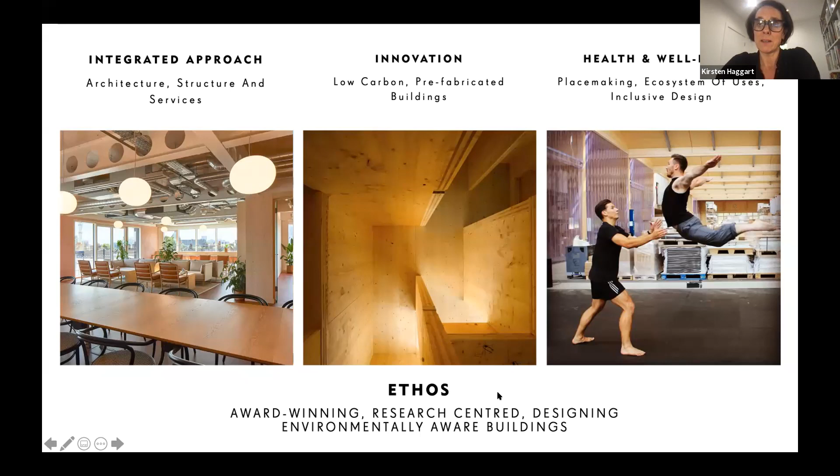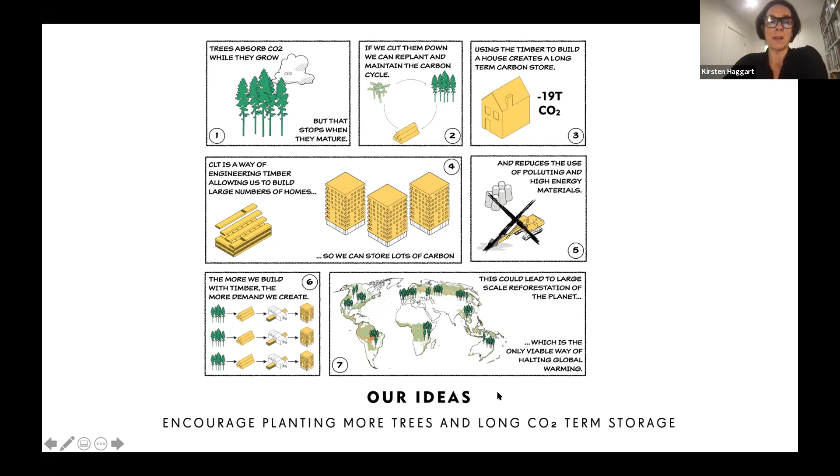So what's our idea? The key purpose of our work and one of the founding principles of it is about building more in timber, because obviously trees absorb CO2, they store it in their tree trunks. And when you cut them down to make them into buildings and then replace the trees in a sustainable way with sustainable forests, as we tend to have in Europe, that carbon that is stored in the tree is saved in the building for much longer rather than it decomposing or being burnt. So the ultimate goal is if we build more with timber, then we can reforest the planet.

And another key part of what this has led us towards is DFMA, so Design for Manufacture and Assembly. And the link here is that CLT or timber manufacture tends to be a digital process in that you send a digital model from your building model and it gets cut in the factory. So this started a chain of thought within us, which you will see later in the way that we've developed various projects. But what that means is that you get much more efficiency in the way that we build, and it's all about minimizing waste as we go forward, as we've heard from COP in the last few weeks.

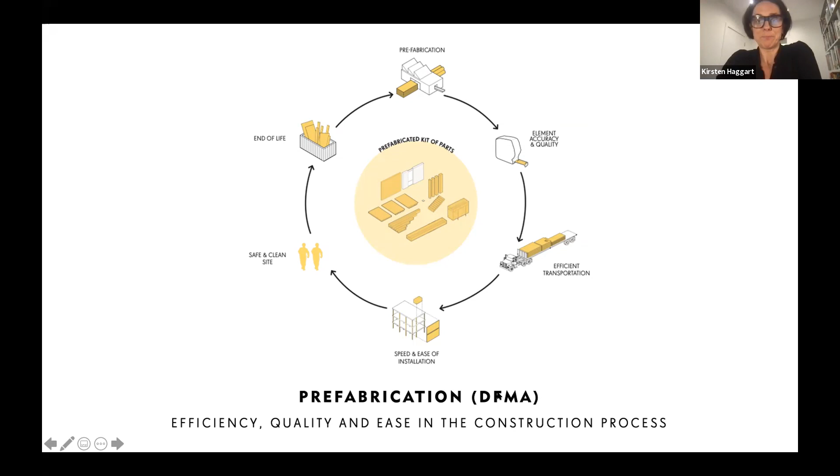So we're running out of time. Again, we've heard this quite a lot recently, and concrete and steel are actually some of the biggest polluters on the planet. If concrete was a country in its own right, it would be the third biggest polluter. So we need to think about the CO2 emissions and where we can. Obviously, concrete is a very important material for a lot of reasons within buildings, and we're not ever going to get away from that. But it's where we can substitute other more sustainable materials to achieve the same goals.

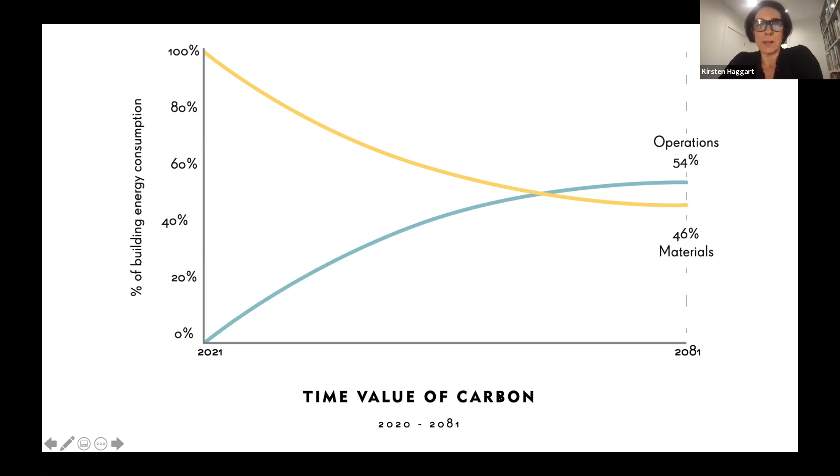So, over the last 20 years, we've been thinking a lot, and I'm sure certainly in Sweden, they were pioneers, and I'm not sure in Turkey, but I'm sure there's huge moves there as well to reduce the energy that we use in our buildings. And we're getting better at doing that by substituting, we can use energy which is from sustainable or renewable sources such as solar panels. But what we haven't been so good at is thinking about the energy used to make our buildings. And we don't have a lot of time left. So we need to think about how we can substitute out those high energy using materials for more renewable, sustainable ones.

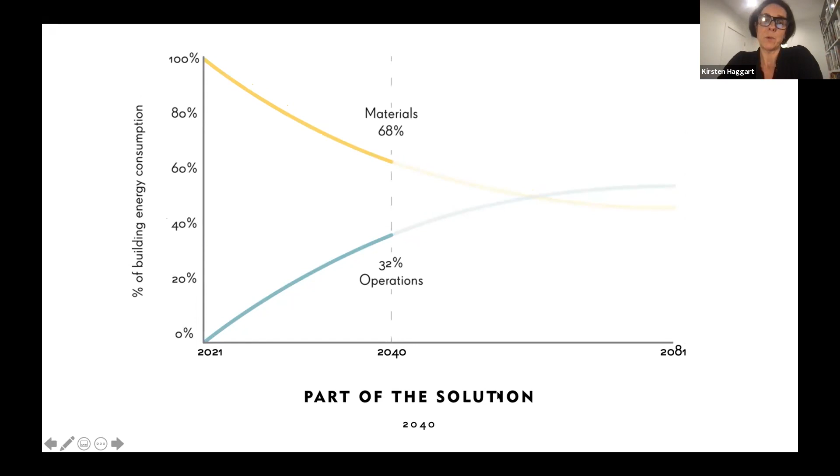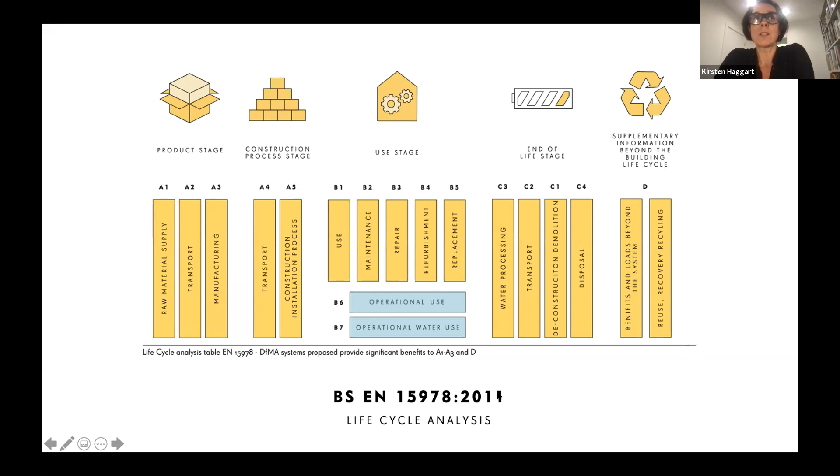And we can see through various policies and directives that are coming through in the UK that embodied carbon is going to be part of regulatory requirements going forward, whether that's through planning policy or building regulations. And we're going to need to be able to calculate a life cycle analysis for every building that we submit. Certainly in London, the larger scale projects are already asking for this. And at the moment, they're benchmarking what the carbon footprint of buildings is currently in order to then set targets for how they should be going forward.

So when we're thinking about this, as I mentioned, the energy in use, so the lighting and electricity that we use in our buildings, is often offset by renewable energy in the supply. With embodied carbon, what we can think about is the amount of energy it takes to make the building, but we can also think about how that can be offset against the carbon that, as I mentioned earlier, is stored in the materials that we're using. And then we've all heard about carbon offsetting as well, which is another way of doing this.

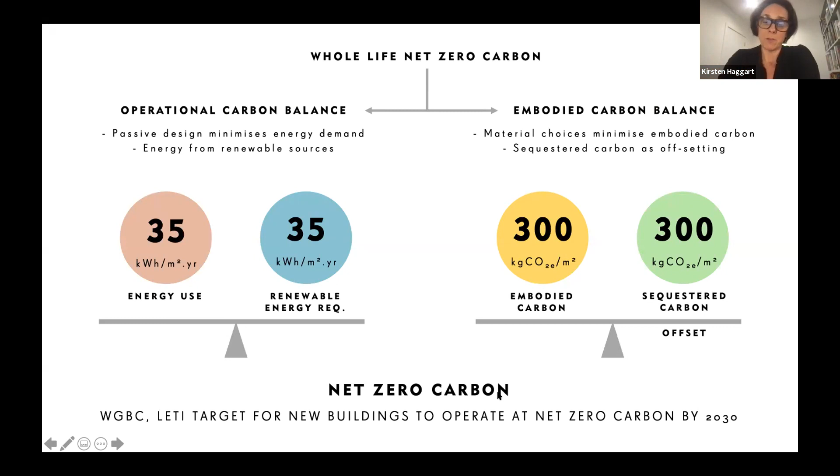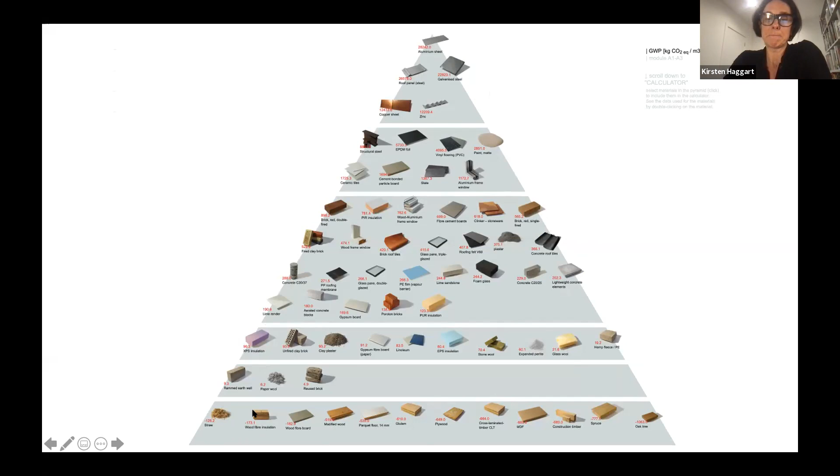And this gives you a sense of where we should be focusing our efforts. Obviously, in structure, which takes up the biggest part of a project, that's where we need to be thinking about what we can substitute in those areas. Obviously, retrofit is an important factor in how we're going to move forward with sustainability. So the more we can reuse existing buildings, the better off we'll be.

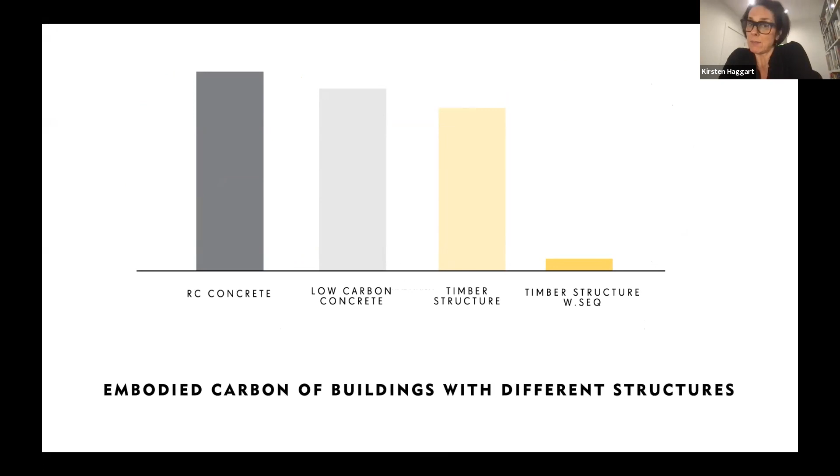And this gives you a sense of, if you use a typical RC frame compared to a timber frame, when you account for the sequestered carbon, so the carbon stored in the material, then we're getting down to very low levels in terms of our carbon footprint. And there's lots of ways we can do that. And this is really the next part of the talk, to demonstrate how we've gone about this over the last 15 or so years.

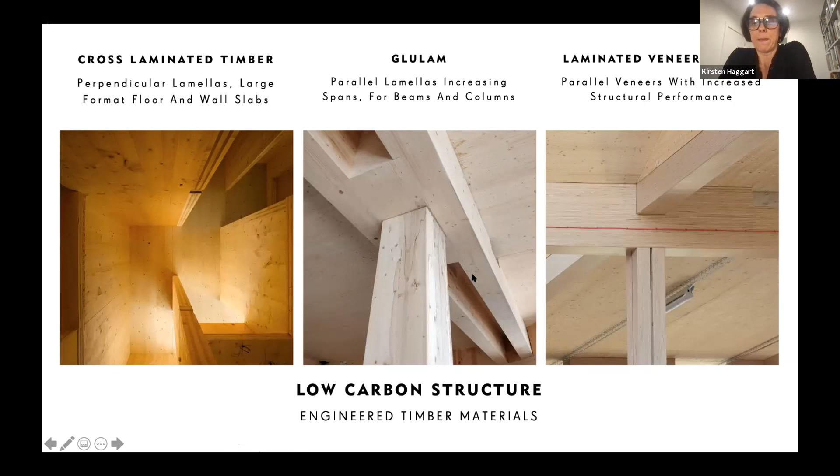And this is one of the first projects that I worked on, back in 2008. This was a honeycomb CLT structure. So those panels that I just showed you were just stacked on top of each other. We try and make sure that all the structural lines go all the way through the building, which was relatively simple to do in this project, which was a housing project. The structure was built in 8 weeks. So 8 floors in 8 weeks.

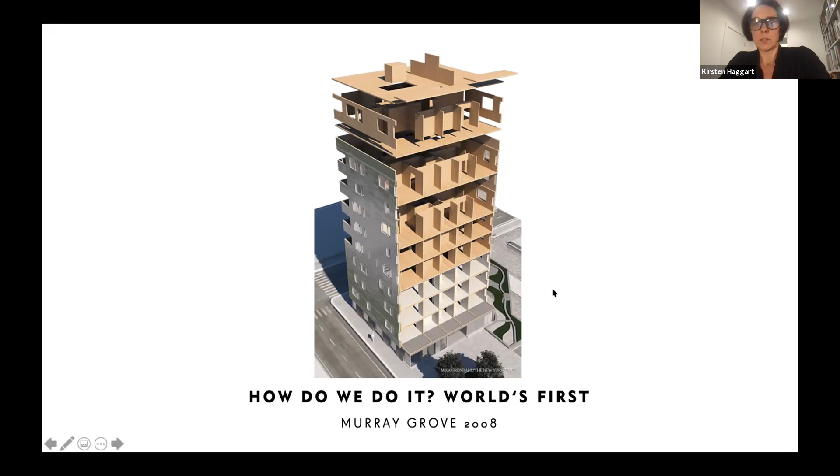Can I interrupt you for 1 second? Yeah. Just to clarify something, because you went through regulations. I know this, but I just wanted to make clear to everybody in Turkey that the municipalities, the building regulations, require you to do the carbon calculations these days. Am I right? Well, it's not in policy yet. We're actually working with one of the London boroughs, and they are updating their policy to include that, and that's going to happen early next year.

And the GLA are asking, so it's not specified what the carbon content of your building needs to be at the moment. What they're asking is for everyone to submit their LCA for a project, so that they get a sense of what the carbon footprint of buildings currently is, so that they can use that as a benchmark to then implement policy. So it's not in policy at the moment, but it will be. Yeah. That's a key difference between Turkish experience and European experience, that government and local government take proactive action towards COP26 ideals. That's a very important factor here.

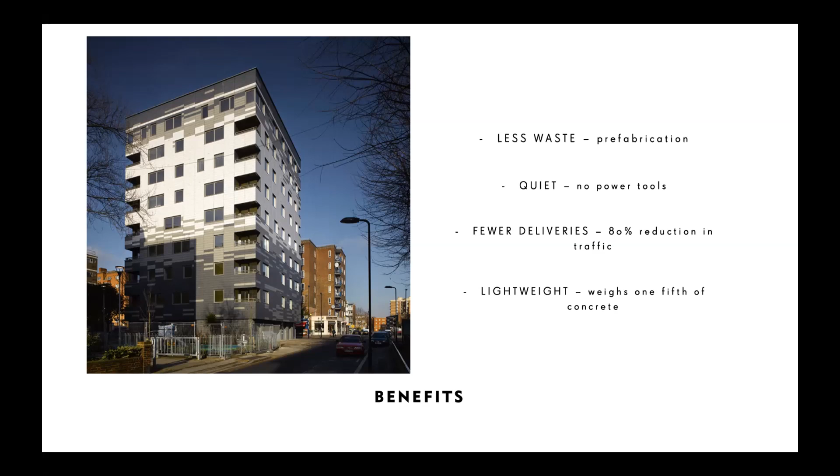The other thing that I want to ask you about, because this will come to people's minds: what about earthquake design in earthquake zones? Such CLT projects presumably are also quite good for earthquake design because of the bracing that you get across all planes, don't you? Because this reminds me of tunnel form construction, which is used a lot in Turkey, a concrete system that also lines up all the elements all the way up. So this would also work quite well in terms of earthquake design, wouldn't it?

Yeah, absolutely, even on a multi-story building. And also because it has an element of slight flexibility in it. And actually one of the research projects that we're doing, called Build-in-Wood, which I'll touch on a little bit, we've got the University of Athens doing seismic testing on the project, which is a glulam frame project. But yes, there has been testing previously, and it does work in seismic areas. Okay, thanks. Great.

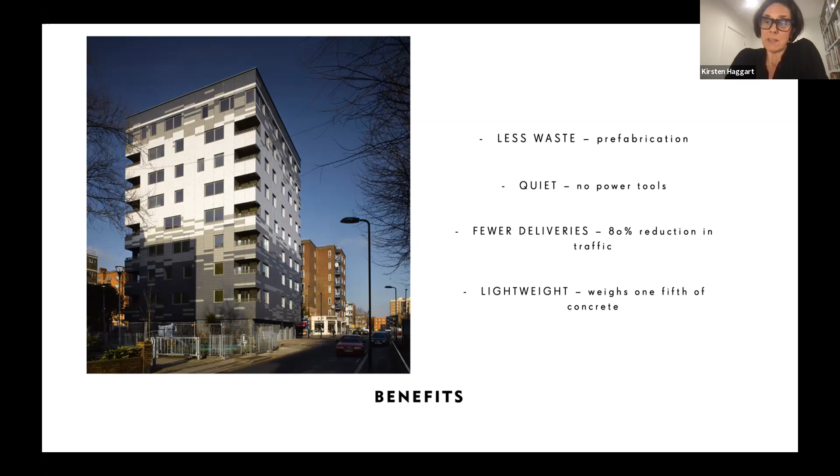So this is the final building, and as you can see there on the right, it's not just the carbon reduction that you get from using timber, but there are lots of other benefits which are really important to talk to developers and clients about. So there's less waste. In an inner city environment like London, it's really quiet. We have fewer deliveries. Also it's very lightweight, so your foundations, generally speaking, are much less than they would be if it was a concrete frame.

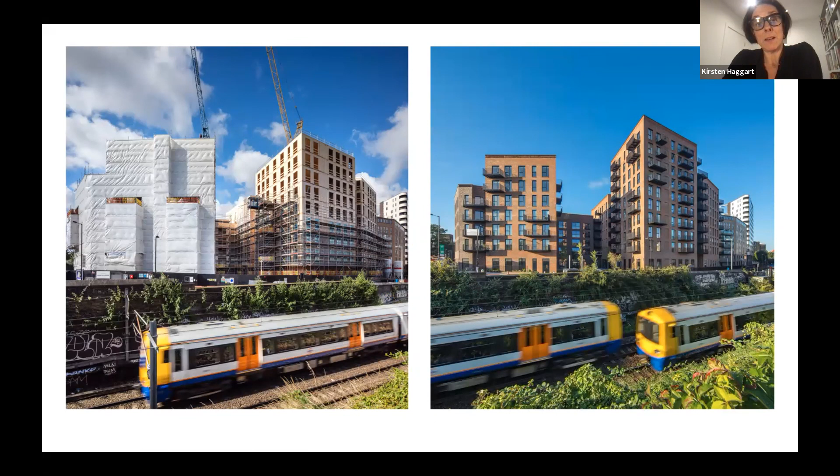And we loved it so much that we wrote a book about it, which I'm sure we can make available to whoever wants one. And then this is another project where we learnt lessons from Murray Grove and moved on to this large, it was at the time and may still be one of the largest housing developments in CLT in the UK. So this is a CLT honeycomb structure again.

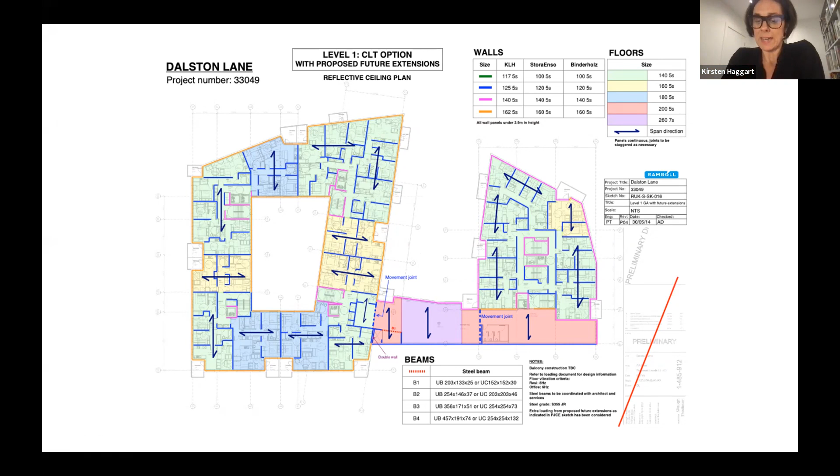But in this case, I'm not going to go in too much detail about this, but whereas in Murray Grove all the wall thicknesses were the same all the way up through the building, in this case we adopted a slightly different strategy where the thickness of the walls around the perimeter provided the stability, and the internal walls were thinner. And then as we went up the building, because the loads become less, the thickness of the panels got less. So we started to investigate material efficiency in that way on this project.

And you can see here in the UK, in London, brick is king kind of thing. And for planning reasons, we were asked to incorporate a brick facade. I think the key point here really is that buildings don't have to look timber to have a huge timber content. And I think that's quite an important message. It is about using the right materials for the right locations, and we can design in details that work for any cladding. But what we prefer to do in terms of sustainability is to use a much lighter weight facade cladding, so that again that minimizes the load, and therefore we get more material efficiency.

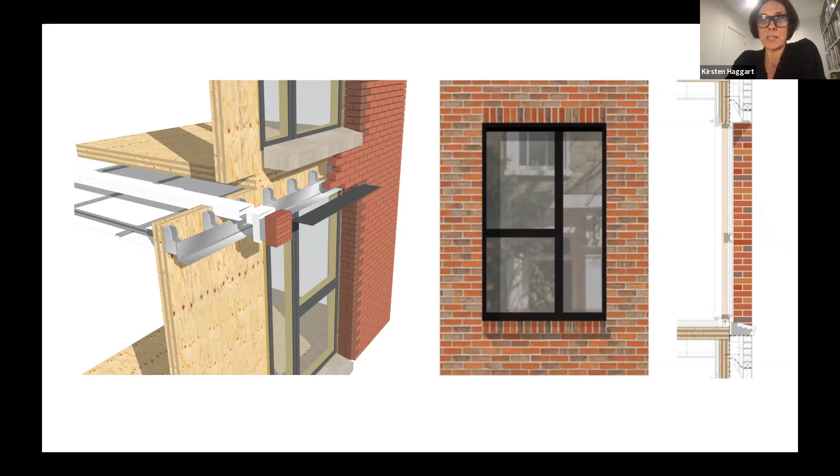And so we substituted out 10,000 tons of concrete and replaced it with 1,930 tons of timber. And also in this particular project, we were able to add additional homes because the foundations were running above the HS2 underground railway line. So that meant that if we built it in concrete, we would have had to have pile foundations. This was actually built on a raft, and the concrete in the foundations was much less. We had fewer deliveries, as previously mentioned.

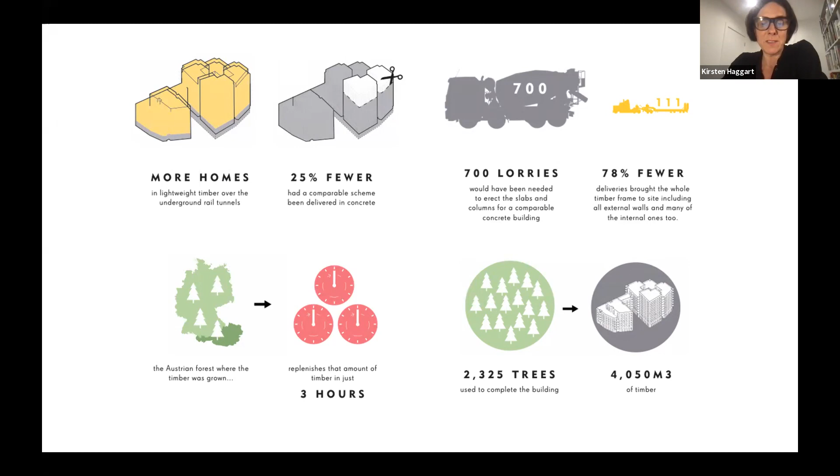And then I think sometimes people worry about the carrying capacity of the forests in Europe. But as you can see here, if we look at this area of Austrian forest, it would take 3 hours to grow the quantity of timber that we've got in this building. And then we have also, in a collaborative way, pulled together a book called The 100 Projects of UK CLT, bringing together architects across different disciplines and showcasing timber architecture to, again, try and break down some of those barriers that people perceive about building in wood.

So then just thinking on a larger scale, I just threw in a couple of Scandinavian projects because of the link with Sweden, and this is in Bergen. In this particular project, because Bergen's surrounded by 7 mountains, a lot of people are moving out of the city. So we were asked to look at perhaps building a master plan over a lake. And one of the things that we try and do with our projects is to look from the very early stages at the massing and how we can maximize daylight into a project, and through the massing reduce the energy load on the building internally.

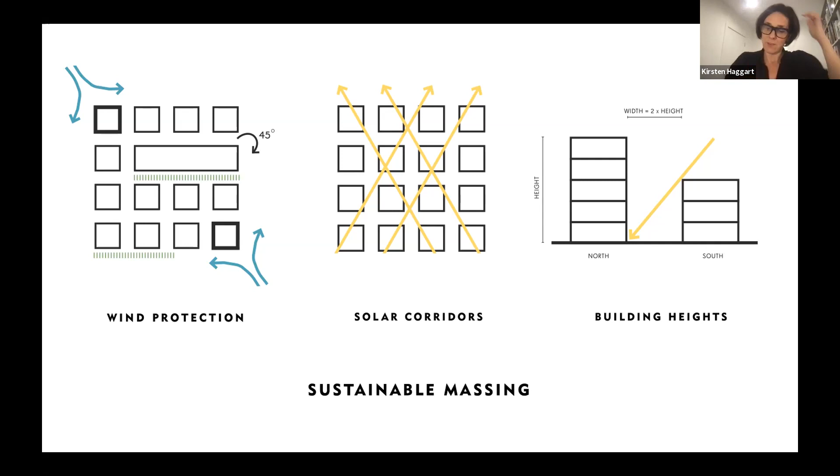So in this particular one, we introduced solar corridors, which allowed more daylight in the morning and the evening to enter into the scheme. And this is a visual of what it would look like. And so these corridors, these canals, sort of Venice of the North, run through the project and through the amenity space to allow as much daylight in as possible. And it also grades up in terms of height, so it goes from low scale to the south and taller to the north. And all this would be built in CLT, and the foundations were made from tunneling that was happening.

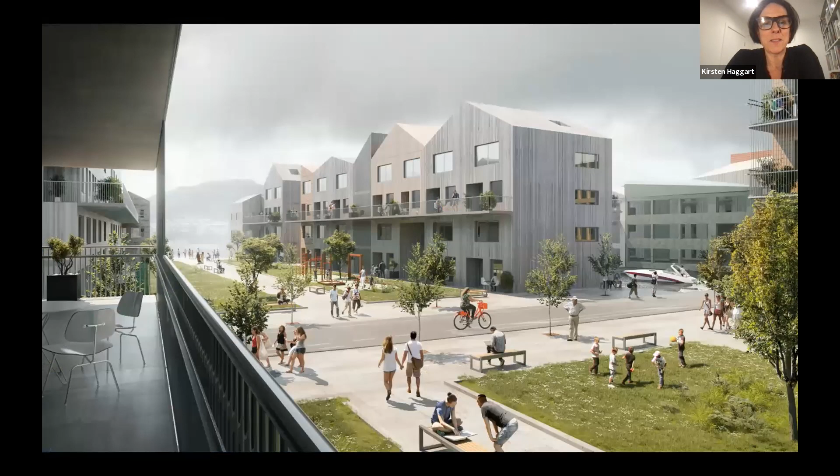They're building a new railway around the city and going through the mountains, and they needed a place to put all the rubble. So we suggested this would be a good opportunity to make the foundations. So you get a sense of what this space could look like, and a boardwalk along the tall side of the project.

Another Scandinavian project is Årstafältet, which we're doing for Folkhem. I believe you had a bit of a talk from Wingårdhs, is it, about Strandparken, and it was the same developer that has commissioned us to look at this. Yes. This is a 229 apartment development in Stockholm. There are several plots in the Årstafältet master plan.

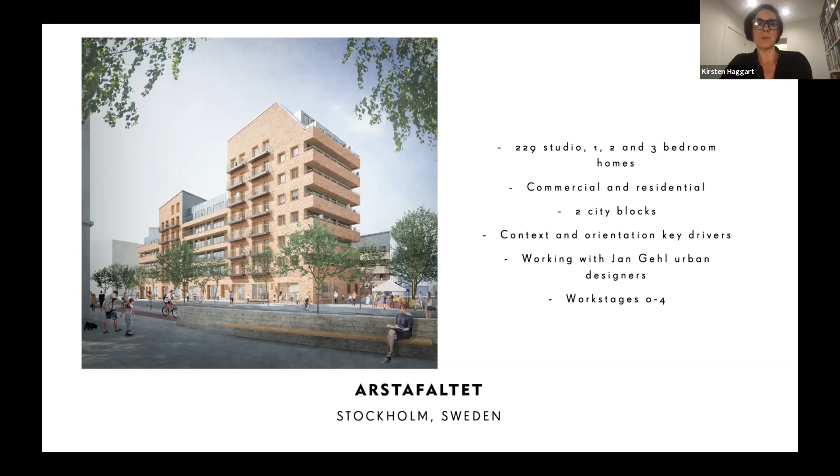And on this project, again, a CLT platform construction. In this case, we've got a tile cladding on the outside. So kind of moving towards that lightweight cladding that I mentioned earlier in terms of material efficiency and reducing loads, and therefore reducing the thickness of the timber that we're using. And this was really interesting because Jan Gehl were working on the master plan, and they had set out some principles about how the blocks were going to be broken down.

But again, here, just as an overall concept, thinking about how daylight and sunlight gets into the project and maximizing these solar corridors to make sure that the courtyard in the center of each of the blocks will be lit as much as possible, and the flats surrounding it will be daylit as much as possible, thereby reducing the energy load on the building.

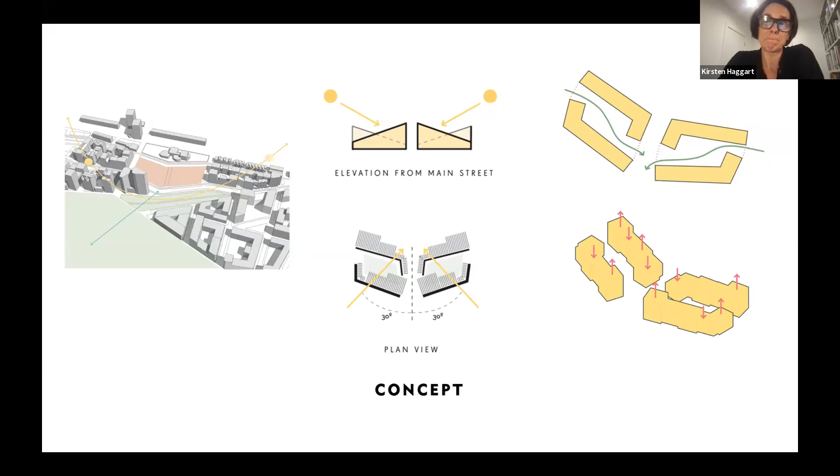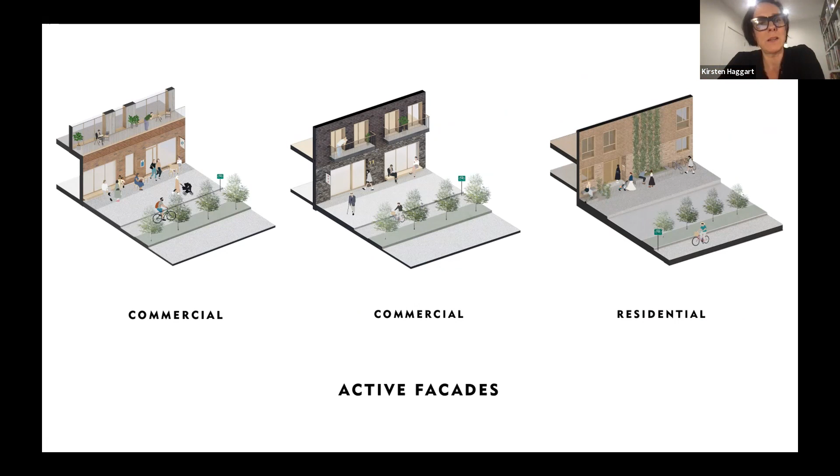And this just gives a flavour of some of the facades that we looked at, which also incorporate some of Jan Gehl's principles about places for seating, breaking down the facade into, I think it was 60 metre, 30 metre, 18 metre, and then 6 metre zones, so that you get a real human scale to the project, which was a really lovely opportunity to work with those parameters. And there, that gives you the Jan Gehl master plan requirements.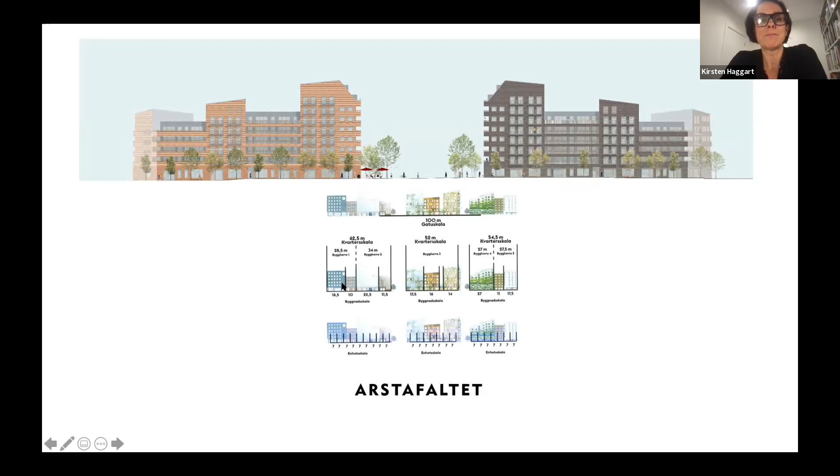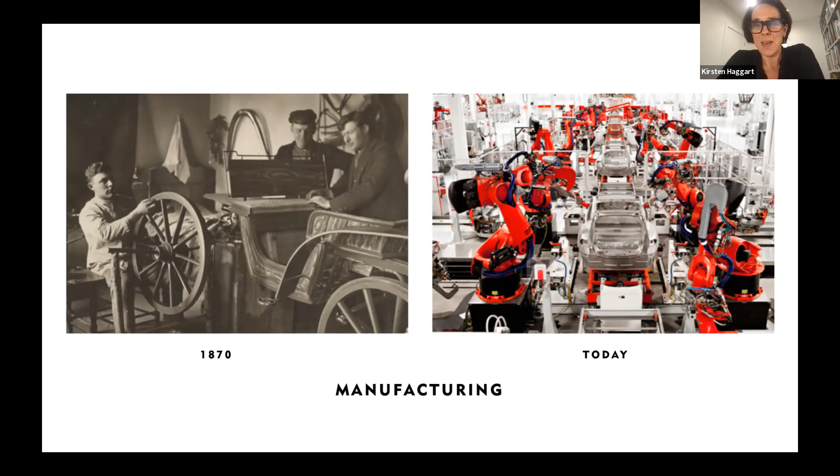Then moving on to modern methods of construction and manufacturing, and how we can bring more efficiency into architecture and building. So we can see here, the automotive industry has evolved unrecognizably from its beginnings in 1870, and they're made of a kit of parts that are brought to the factory and assembled. So it's an assembly line.

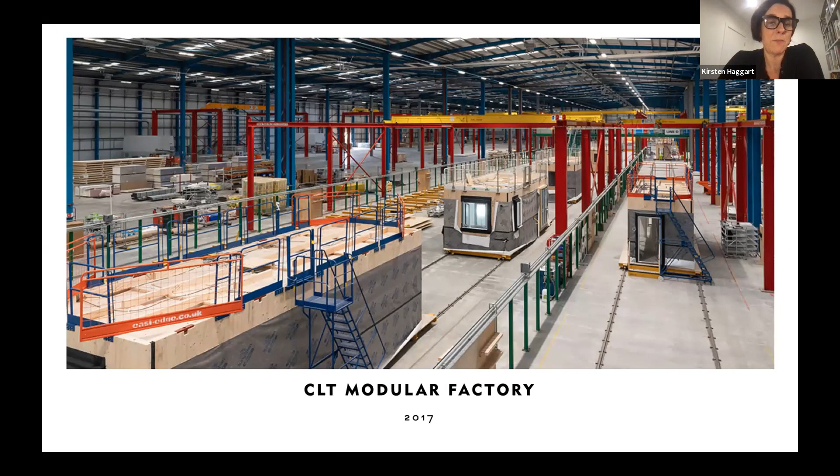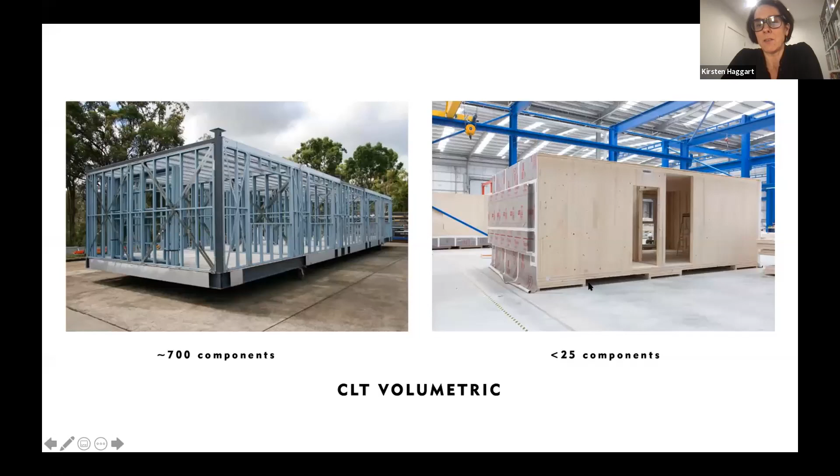And this is an example of the L&G assembly line; we helped them to develop their modular product. And this is also made out of CLT, so it's a CLT modular design. And L&G, being a big investment company, saw the benefit of going towards a more mechanized way of building. Again, it's about parts coming together. And if you're thinking about the number of parts we have to bring together, if we go for a light gauge steel option, there are so many more components than the simplicity of a CLT module.

And I think a lot of people are concerned about the potential repetition that you get with modular. I think there are some projects that are much better for modular, in my view, than others. For example, student housing and hotels, where you have a very repetitive model along the way. But these were actually designed for homes, which were individual homes as well as for multi-story. And we needed to build in quite a lot of flexibility into the system itself.

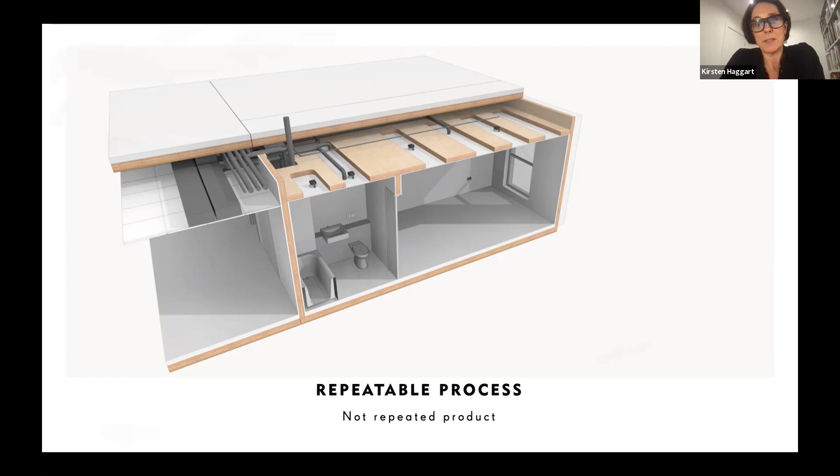This one was for Swan Housing, who have also built their own factory. And we helped them to develop a design guide for their product, as well as helping them with the manufacturing process. So it was a really fascinating project to be involved in, and also meant that we had to rethink how architects think about building, because in a conventional build, it's not really our responsibility to worry about how parts of the building arrive on site. But with modular, you've got to get it from the factory to the site. So how it's going to be transported, how it's going to be lifted into place, all need to be considered. So it's a whole new way of thinking.

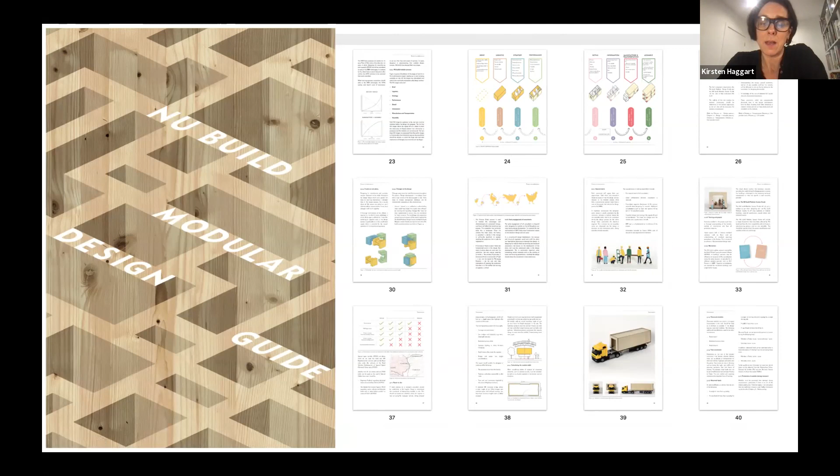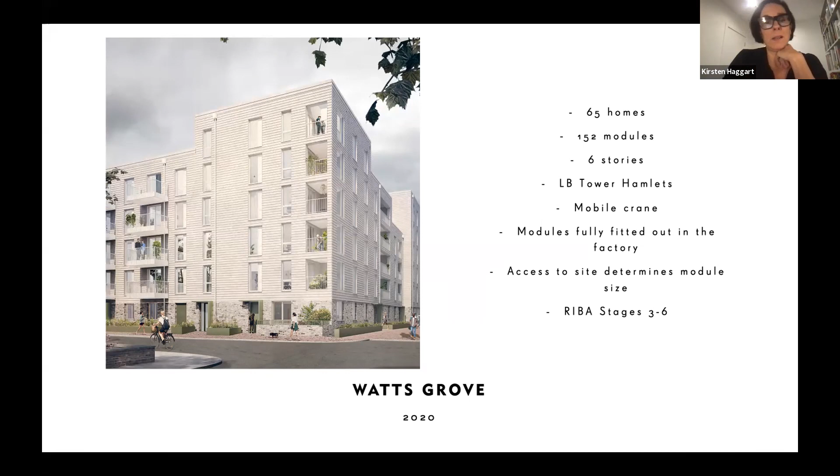Can I ask a question? Ooh, yeah. Can I ask a question about comparison of cost to an equivalent concrete or steel frame building? Yeah. Have you done that kind of study as well? Did you do a cost analysis?

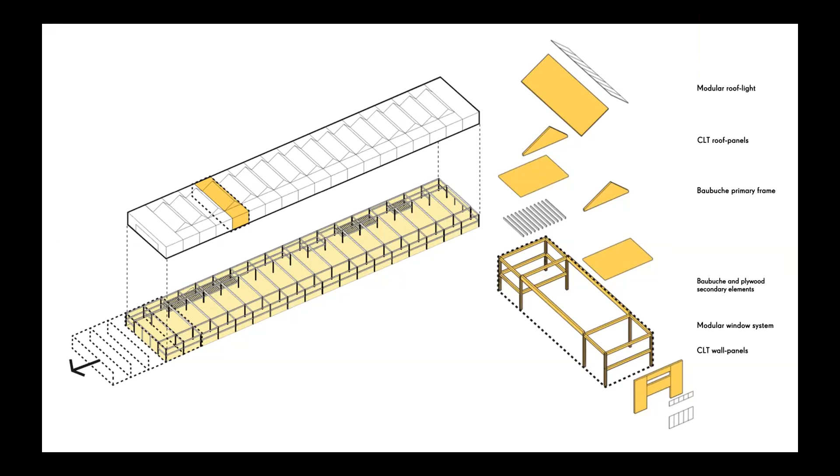Particularly for clients who aren't coming to us for a timber building, there are many benefits along the way that they realise it's a good alternative for that reason. So you don't have to sell it purely on its environmental credentials. No. It's also cost equivalent, especially in a market like England. Yeah. I think with maybe the big distribution warehouses made out of steel, we might struggle a little bit more to get those over the line in terms of the costs.

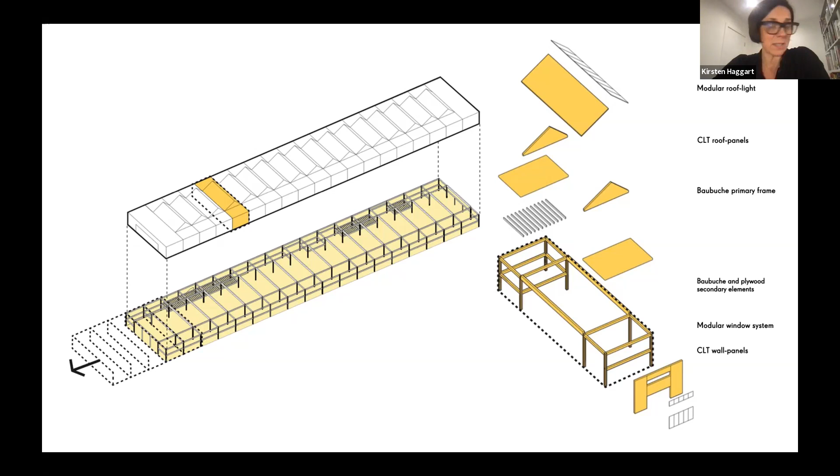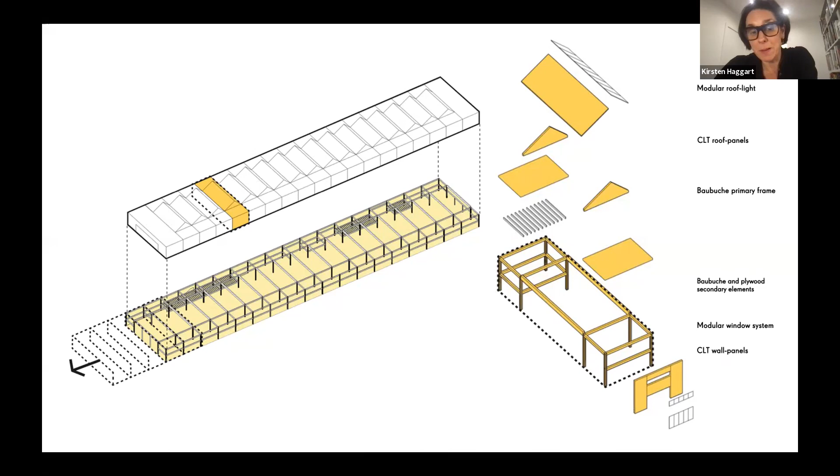But interestingly, Stora Enso have just developed an industrial glulam system, which includes CLT, and is really interesting. They've got various different scales and sizes, so they're working towards a more industrial approach and how we can substitute out steel and concrete for those sorts of buildings as well, which is fascinating. So the argument against cost is diminished as well, because the more they build, the lower the costs. And once you've got a system that's set in stone, you know what the parameters are, you can roll them out more easily. Yeah.

And this is a project we've got on site at the moment called Black and White. It's just around the corner. So if anyone's over in London, we're always happy to take you on a site visit. This is our Black and White project, which is a commercial building, offices. It is 4,500 square meters and is made again from an LVL frame with CLT floor plates. The timber facade is parametrically designed, so each facade is slightly different in response to the sunlight and to minimize overheating in the building.

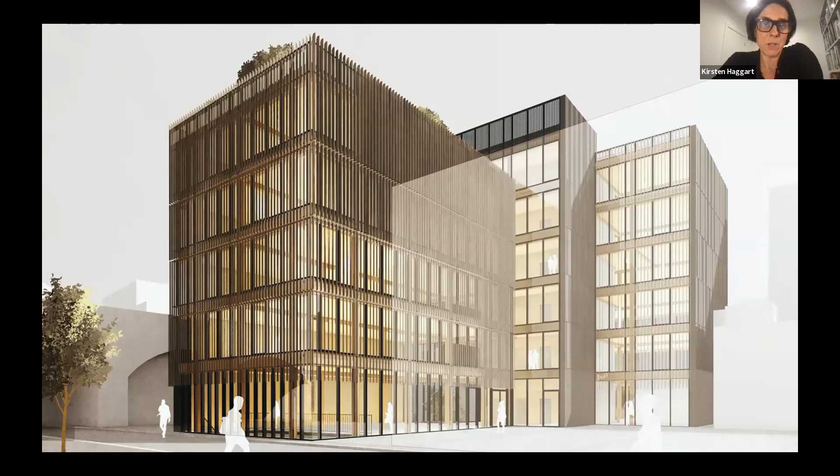And this is a CGI of it, which was a planning CGI. And because we've done a few commercial buildings now, this is our third office building near the office. We have others around the world. But what we're finding is that developers are coming to us now for that biophilic and sustainable model that they can sell to possible tenants. And I think this is something that we're going to see more and more of. Well-being for employees is becoming really important.

So yes, it's made from bio-based materials. It sequesters 55 kilograms of CO2 equivalent per meter squared. It's passively designed as much as possible to enhance natural ventilation. And the carbon footprint has been reduced by as much as 60% compared to if it had been made out of concrete.

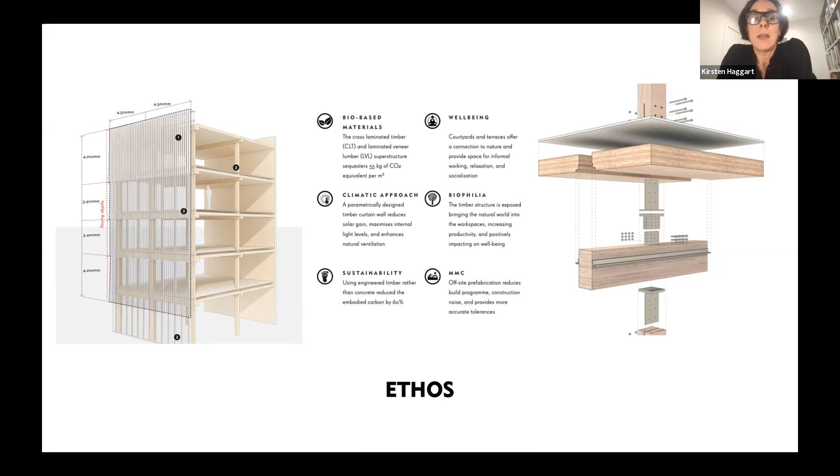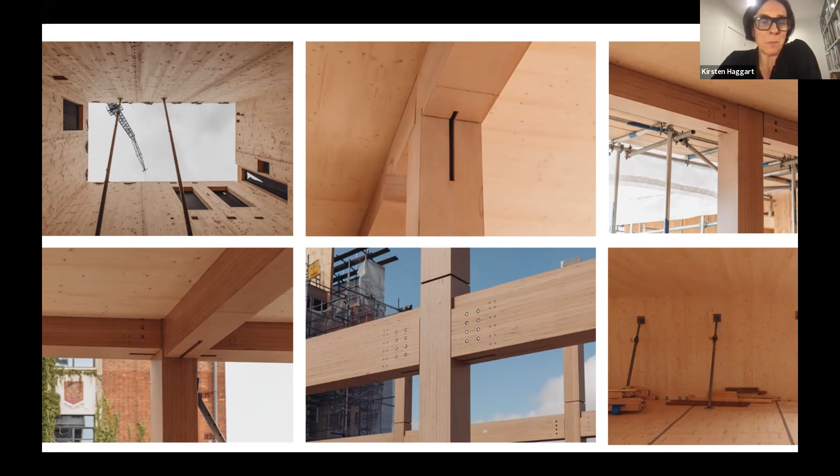And what we need to get closer to is how we can link all the consultants' information seamlessly through to manufacture, so that the holy grail really is kind of the same as building a car. It's a production line. When you get to site, it's bringing together components rather than actually every single part of the building coming together.

And you can get a sense here of how these spaces are going to feel when they're occupied. And then finally, I'm just going to touch really quickly on the Build in Wood project that we're doing, which is an EU-funded project, 10 million euro, led by the Danish Technological Institute. And the whole purpose of the project is to break down the barriers, the perceived barriers, of building in timber

across Europe. So the objective of it is to design a multi-story system that can be used for residential and commercial up to between 4 and 10 stories, because at the time we thought, well, what are the typical heights that you would get across Europe? In London, we have a tendency to build very tall, but across the rest of Europe, certainly not in the major cities, it's a lower scale product that's needed. So that's why we ended up with that as a dimension.

And then we had to look at different regulatory requirements in terms of building regulations, look at the different markets, and also, as I touched on right at the beginning, think about retrofit. So the facade panel should work not only for the structural system, but also for applying to other existing buildings, which may well be concrete frame.

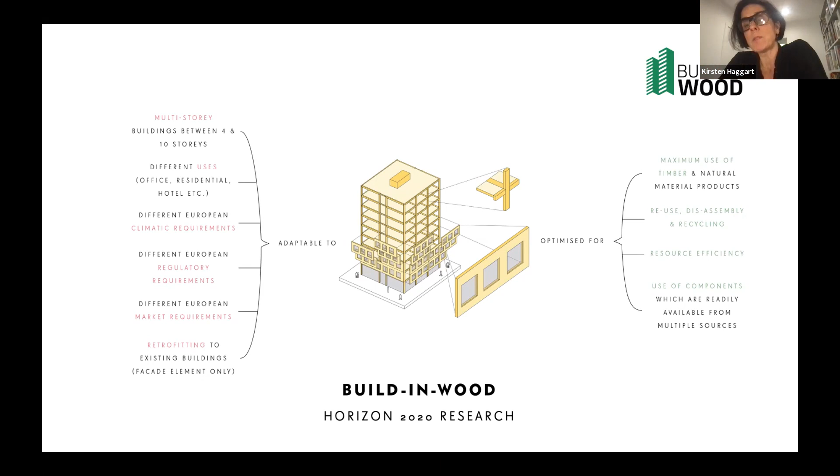And we also, as part of that process, needed to maximize the use of natural materials, particularly timber, and think about reuse, disassembly and recycling, which is an important part of a life cycle analysis, to make sure that the building that you're designing, albeit in 80 years' time, can be taken apart and reused, and how that process can be optimized in the design of the building at the beginning.

So there are various criteria that we've looked at and incorporated, and we were in charge of designing the system, but there are other work packages which include looking at using recycled timber in CLT. We're talking to early adopter cities about how their policy may change if they decided to promote timber in their cities,

and that's why we know about the Haringey situation, where they're thinking about embodied carbon, and we're hopefully going to be building a few pilot projects out of the system as demonstrators, so that people can see in real life at one-to-one scale how this can be rolled out across Europe. So it needed to be accredited. We've got lots of testing going on with Knauf and the University of Athens, and also the Danish Technological Institute, about moisture and fire and acoustics.

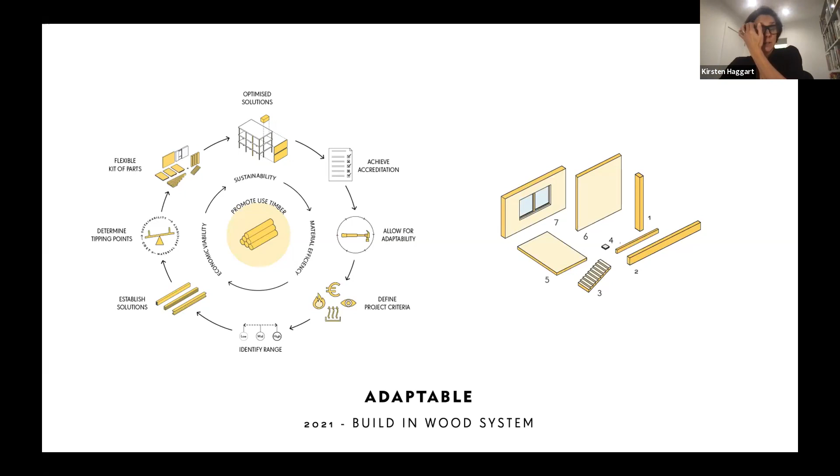And then when we were looking at the different parameters for the project, we needed to identify a range of performance, which is what this little symbol at the bottom is. So we have a range of different build-ups that can allow for different requirements in building regulations across Europe. And what we came up with was a kit of parts, which is very simple: post and beam glulam with either a CLT or rib deck floor plate, and then a non-structural facade panel, which can be adapted to different thermal performance and acoustic performance.

And this is the system that we've ended up with here. We went through a process of looking at all these other ones, which I've already shown you examples of, but I think the use of structural timber and engineered timber is evolving all the time. And I think the importance of material efficiency is a really important one. So when we're looking at a glulam frame like this, we're using much less timber than we would in a CLT honeycomb structure.

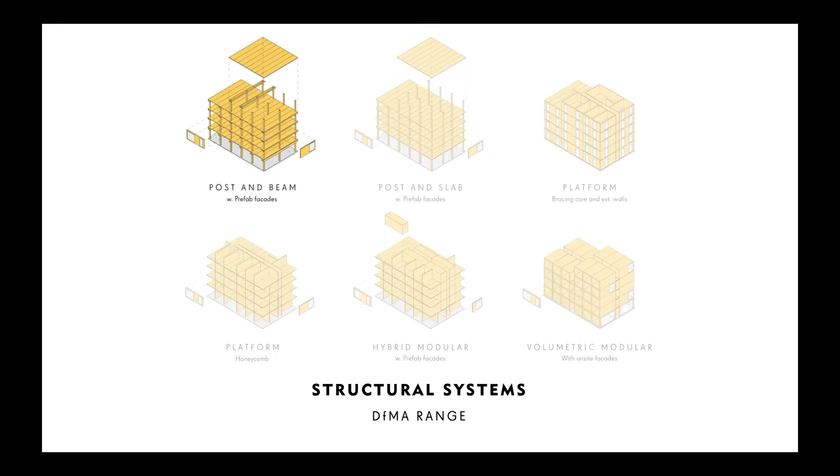What's fascinating is that it's looking more and more like a concrete frame, exactly, but in timber. Well, and actually, in a way, that's really good, because it's really easy for builders and clients to get their head around. Well, also much of the work is done off-site, and that's the most attractive side of it. The site is less messy. You spend less time on site.

But the thing that will stick in everybody's minds is fire. How do you deal with fire regulations, especially in multi-story buildings? What's the fire equation there? Yeah, so the Danish Technological Institute did an assessment of fire regulations across Europe, and this is open source. So if you go on the Build in Wood website, you can access all this information. And as we develop more of the system, more will be available as well.

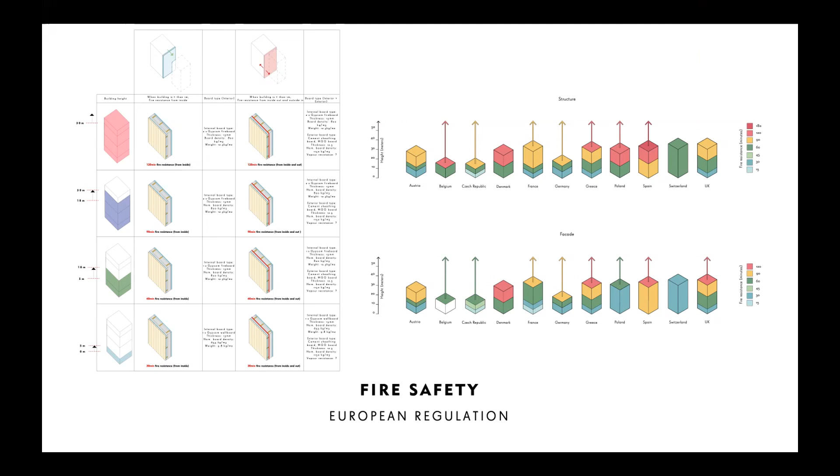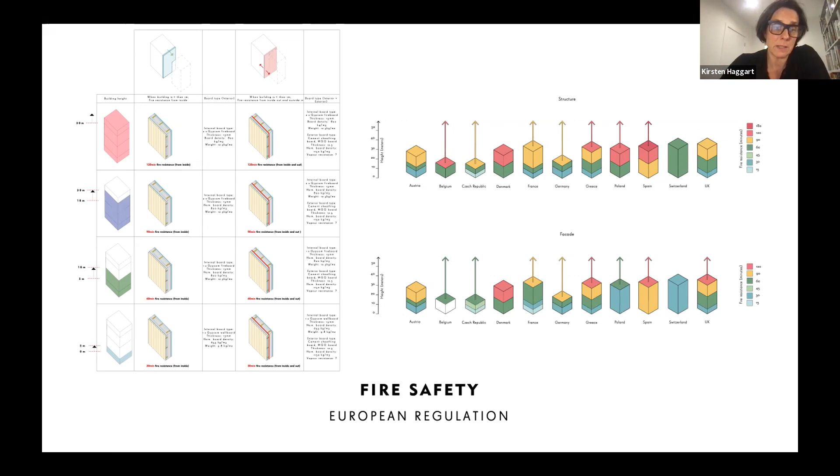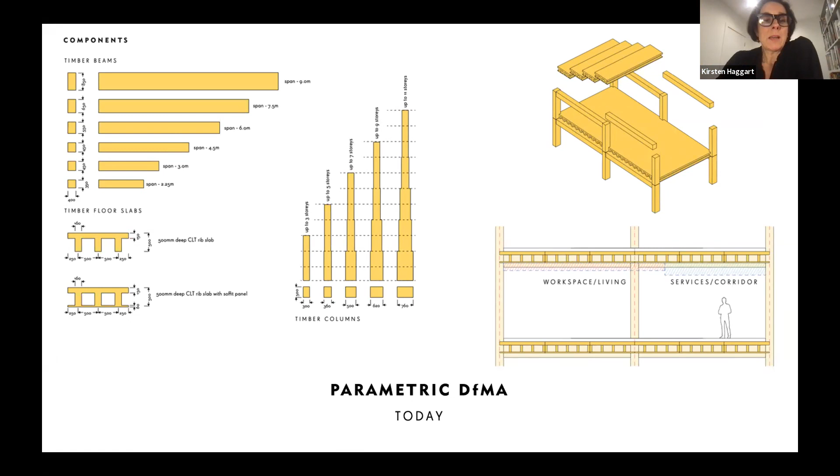And there is a lot of test information out there which demonstrates the viability and the performance of CLT in fire. And this just shows you the range: once you know what your site is, whether you're building a residential or a commercial project, you can put in the parameters and identify what the scale and size of the frame might be, and whether you're going to use a rib deck or just a CLT slab. And it can work for commercial, residential, and extensions.

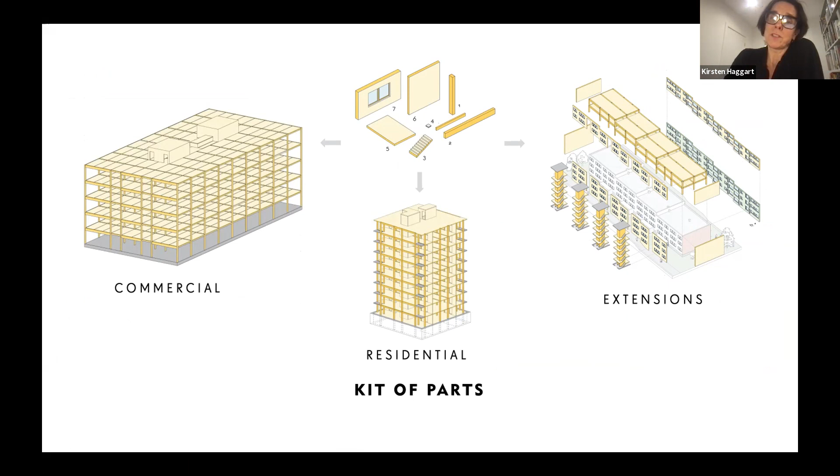We've already done a pilot sketch scheme for a project in Trondheim where they want to extend some housing developments, and it makes a lot of sense because it's very lightweight on top of an existing 4-story building, to extend that with a couple of stories and then use the non-structural facade panel to overclad the whole building. So the opportunities and the options are endless, really.

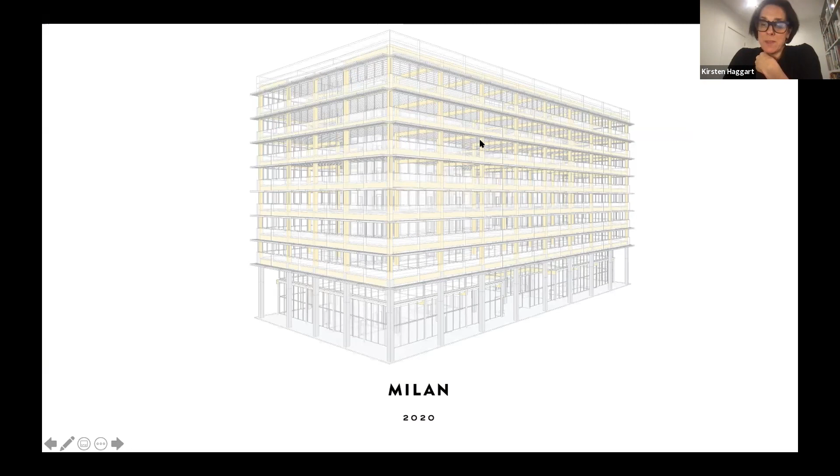And just as a way of demonstrating that this isn't just research, we've got a project in Milan at the Arexpo, the Mind Milan Innovation Park for Lendlease, and they're using a really similar system to the one that we're doing for Build in Wood: a glulam post and beam with a rib deck floor plate. And you get a sense of what that space might look like. They're due to start on site next year.

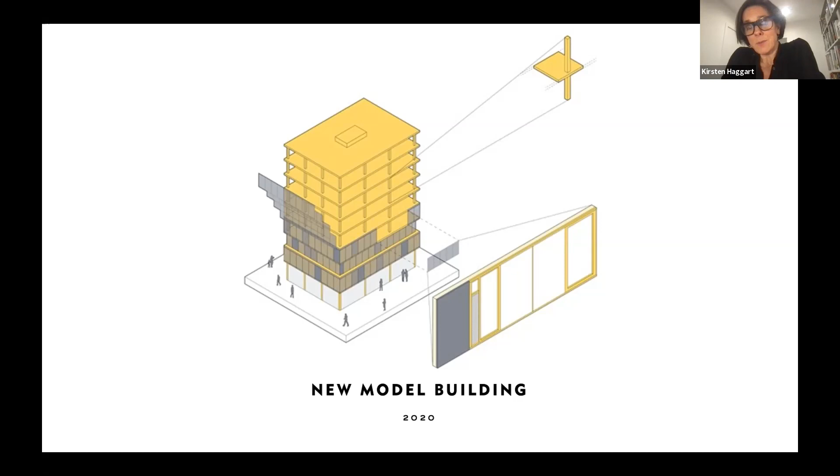And then finally, touching again on the fire issue, in the UK they've changed the fire regulations, so you can't have any combustibles in the external facade. So that has slowed things, it has to be said, and this is only in residential. On the commercial side, we're seeing a real drive towards buildings that give you a sense of well-being. With the residential market, we're looking at this as an alternative solution where we substitute the concrete frame for a timber frame, but overclad it with a non-combustible facade.

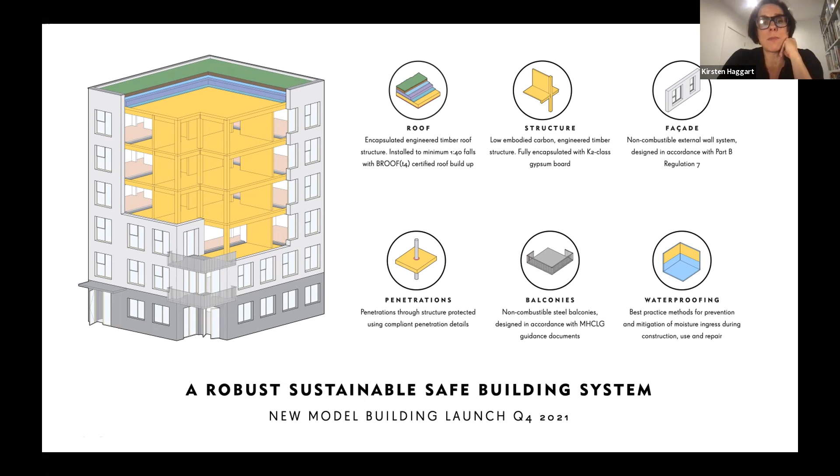And we're working with the fire engineer who assessed the Grenfell Tower, Jose Torero from UCL, looking at how we can demonstrate that the fire performance of this building meets all current standards. And we're also working with housing warranty providers as well as insurance companies to get a warranted system that people have confidence in and doesn't stem the flow of sustainable construction. So we're developing details, etc.

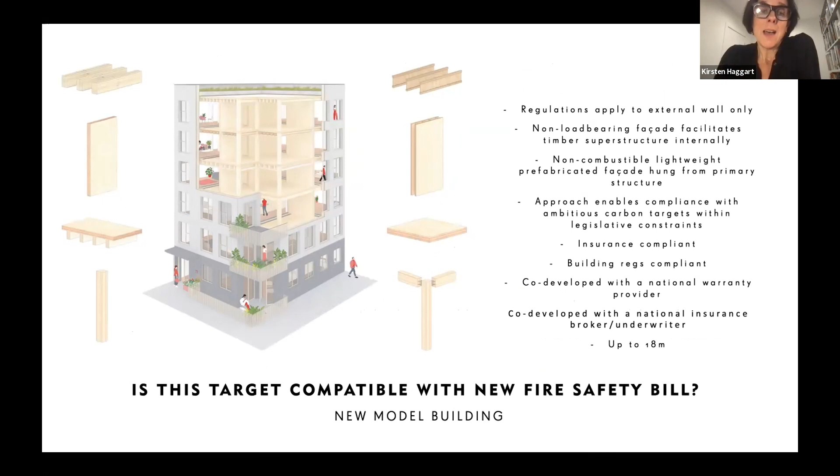So I think it gives you a sense of that renewable story that building in wood really does give us.

Thank you. Thank you very much. Thank you very much. Very, very nice presentation.

Well, it's stupendous, actually, the amount of timber construction you have got under your belts. It seems as if it's been going on for quite a long time, but actually it's the development of the last, at the most, what, 5 years, is it? 10, I suppose. Murray Grove was started in 2008, but that was quite a one-off, and then from there it's sort of grown. But it's exponential. The growth of interest is exponential, isn't it?

And England, relative to other countries, is catching up relative to, let's say, Austria or maybe Denmark. And you're one of the causes for that catch up, by the looks of things. I think, well, we've certainly, and Andrew has definitely been. I mean, what I was fascinated by: I was at a meeting a couple of weeks ago. I felt very strange to be there because I was asked to go with someone from Cambridge University to talk to some of the biggest investment owners in the UK, if not the world.